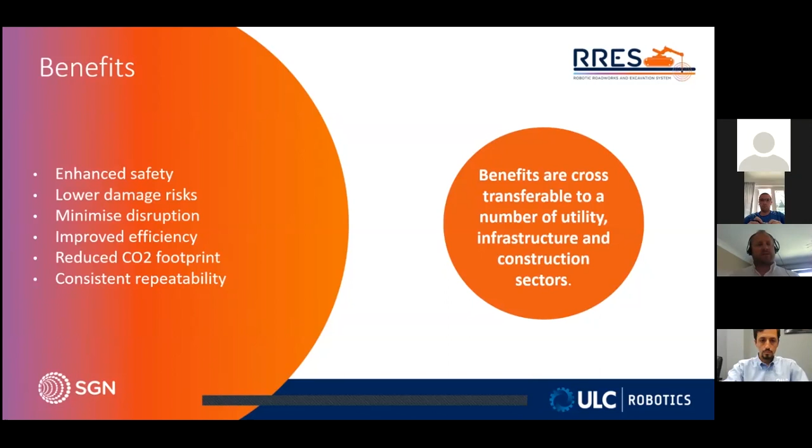Do you want to pick up, Al?

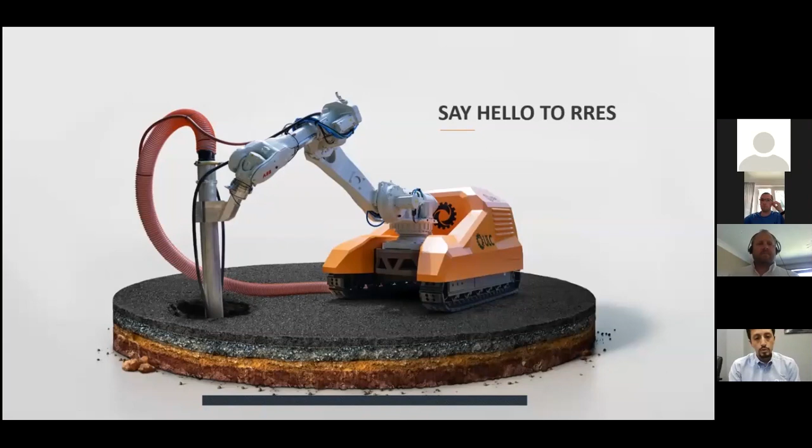Yes, absolutely. Good afternoon everyone. Thank you John and Ollie for the introduction, and thank you all for taking the time today to attend this webinar. My name is Ali Asmari, I am the program manager for the robotic roadworks at ULC Robotics. Today I want to take you through some of the technical development we have done in the past 2 years under this project, and at the end we'll finish with Q&A, and hopefully toward the very end we'll give you a demo of the robot in action.

I want to start my presentation by talking about the robotic platform we have developed for this project. The core of this system is a 6 degree of freedom robotic arm that you usually see operating in manufacturing facilities in a very known environment, doing routine operations like welding or moving specific parts from one spot to the other - mostly behaving very accurately in completely controlled scenarios.

What we have done is taken that robot from indoor use, put it on a track platform, made it mobile, provided it with proper power and control systems so we can take this into basically unknown environments, roadways, and conduct the same routine operations - but adding a bit of smart through AI and machine learning so the robot can take this risky and dangerous work from the operators and provide them with better tools to conduct this operation more accurately.

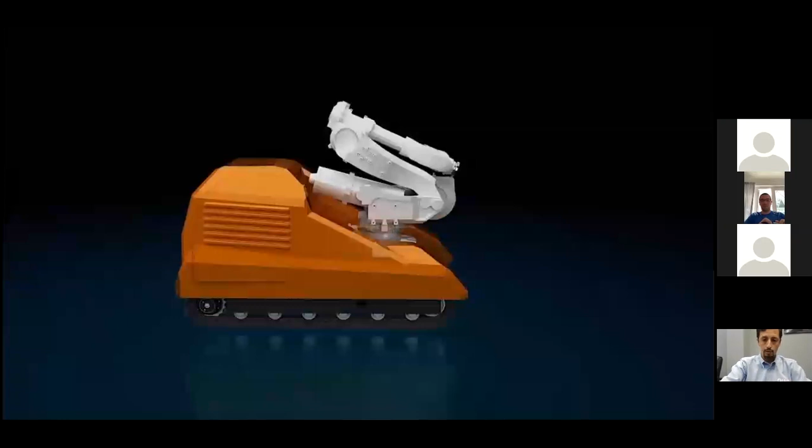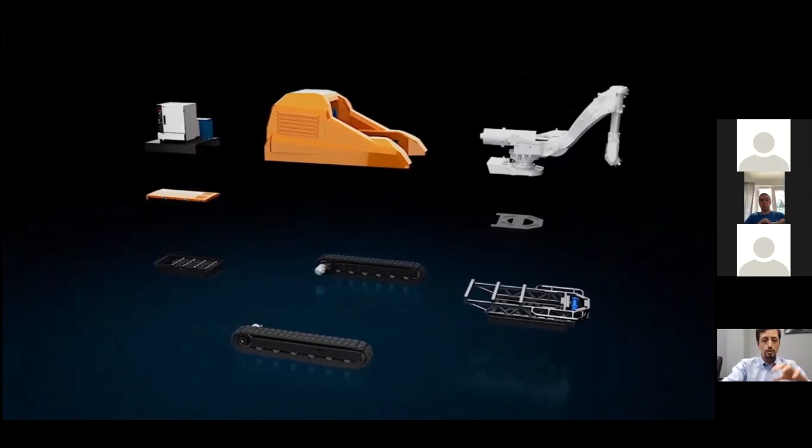So here you see a breakdown of different components of the robot. As I said, the 6 degree of freedom robotic arm, a fully electric power system that can last about 8 hours of operation minimum. The system is mounted on tracks, allowing the robot to go on different terrains, and everything is covered by a waterproof cover that allows the robot to operate in different weather conditions as well.

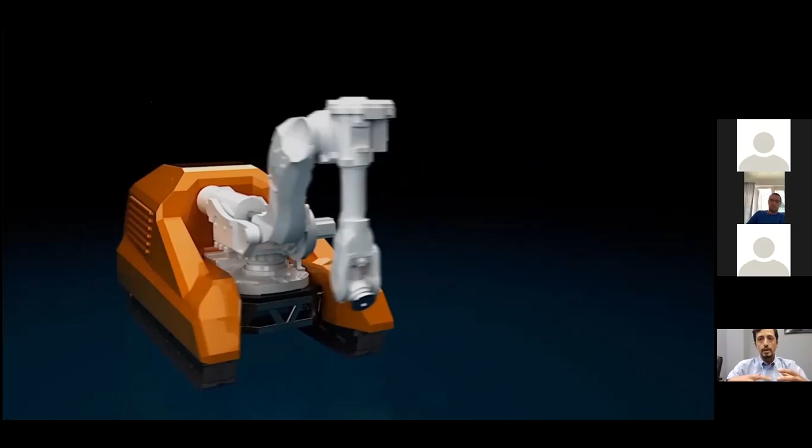Now, the idea is to create this kind of open source mindset development kit that is capable of doing all this operation in new environments outdoor, and then later developing new tools and end effectors for this robot arm to use, articulate properly, and automate different routine tasks.

Under Robotic Roadworks excavation system, our purpose is to automate this excavation operation end to end, starting by scanning the ground, identifying the locations of the assets that are under the ground, then cutting the road surface and removing a core from the ground.

The next step is agitating the soil, the column of soil that's above the buried assets, and then removing them. Once the buried assets and the pipe are exposed, getting the robot to conduct operations on the pipe, such as installation of a fitting, installation of sensors, or doing any type of repair work.

Once the work is done, recycled material would be put back in, and the same core that was taken from the road surface would be reinstated, with the hope that this entire operation can be done autonomously to some point with minimum supervision from the operators.

Now I'm going to take you through the different technical aspects of each tool head that we have designed and created for this robotic platform. To start off, it's sensing the ground. Prior to any excavation, we use a suite of different sensors that the robot carries above the ground and then collects data from above the ground.

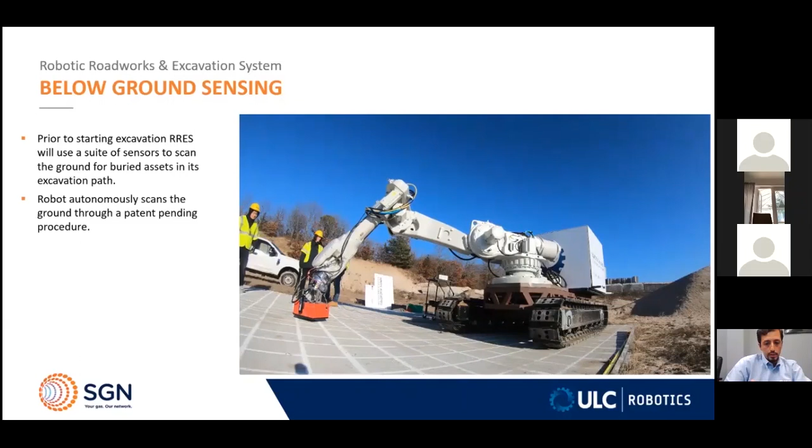One of the main benefits of using the robotic system rather than manually collecting the data is the accuracy of the robot arm, which allows us to basically overlay data collected from different sensor technologies on top of each other, knowing exactly where every single data point was collected from. By overlaying all of them together, we're able to have more precise, accurate maps.

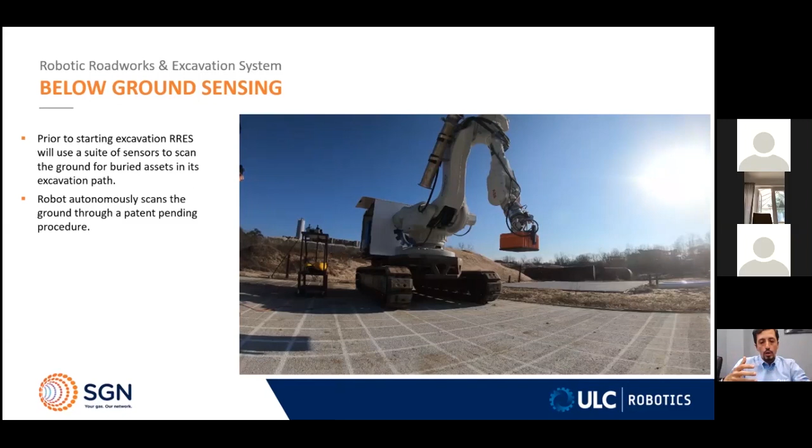And with this accuracy, the robot can collect much higher resolution data.

Once the data collection is done, usually the big challenge is what do you do with the data? This is super technical information that a typical operator conducting the operation isn't able to make sense of. So we have developed computer algorithms that autonomously process all this data collected from different sensors at different locations of the site, process them and fuse them all together, trying to generate a 3D map of the assets under the ground.

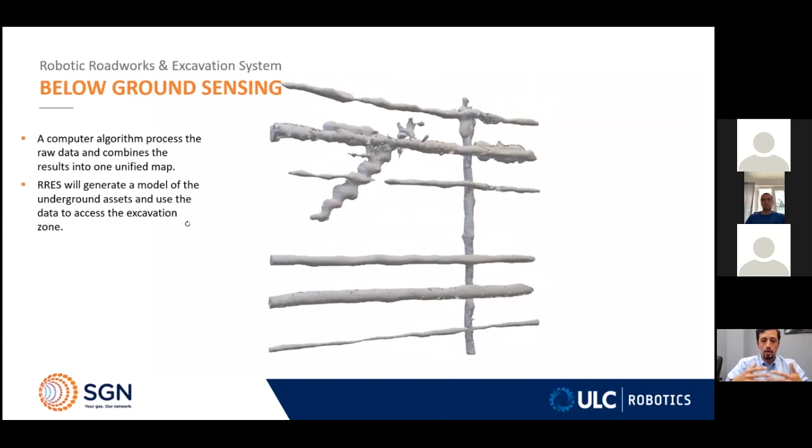Here is one of the renderings of some of the recent work we have done — basically the data collected by the robot, processed autonomously, turned into 3D contour maps, so that the operator can interact with this type of map, identify the locations of the target asset, as well as get an understanding of the environmental conditions around the area where we are doing excavation, to be mindful of hazardous networks like a high voltage cable in the vicinity of the operation.

Once the sensing is done, the target asset is identified, and we know the location to conduct the operation, the next step is cutting the road surface and exposing the soil.

Under the project, we have fabricated a custom road cutting device. This allows the robot to pick up this tool from its tool set and then articulate it in different patterns to create different shapes of cuts on the road. So we are not really bound by a specific size or form factor for cutting the road surface.

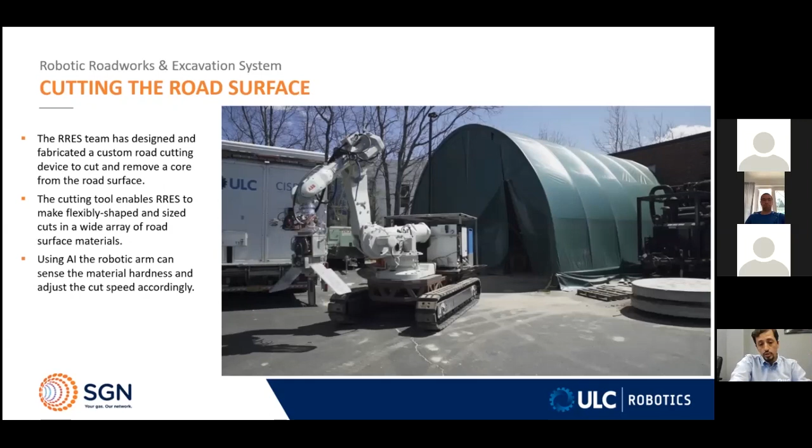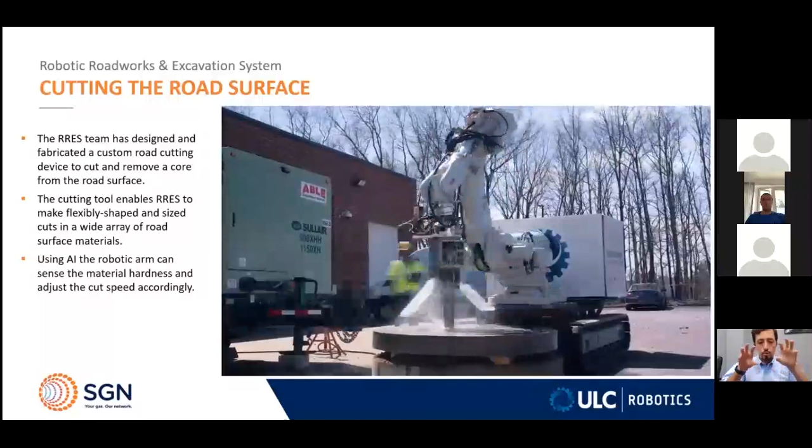Using this tool that you see in this video, the robotic arm can cut not only circles but also oval shapes from the road surface. So the idea of cutting 'Olympic rings' — creating a pattern of multiple round cuts together to expose a wider area for excavation — is completely gone now.

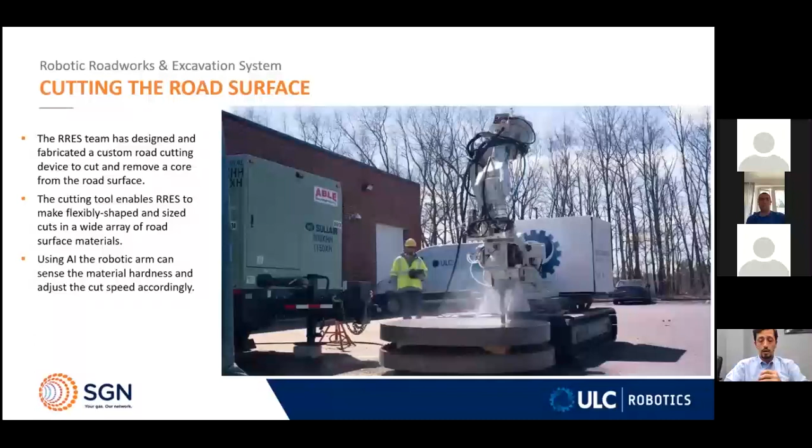The robot can do any form, any size, any shape, and cut it out of the ground. Using AI, the robotic arm senses the amount of load being applied to the ground and the material. In real time, it makes adjustments to the trajectory of the cut, also tweaking the amount of force and load applied, which increases the lifetime of the tool and optimizes the operation.

So when we have to cut, for example, through a reinforced concrete deck, the robot can slow down when it's hitting a rebar and cutting through it. When the material is soft, it can speed up and finish the job much quicker. We can also accurately control the depth of cut, so we know exactly how deep we need to cut before potentially causing any damage to the assets.

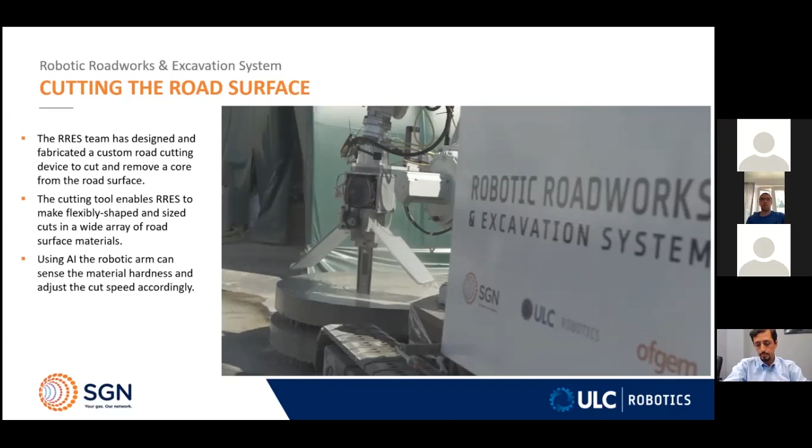Under the project, we have also developed other tools that allow the robot to drill a pilot hole from the core, for example a 75mm pilot hole, giving operators more understanding about the condition of the deck, as well as the depth of cut that needs to be done.

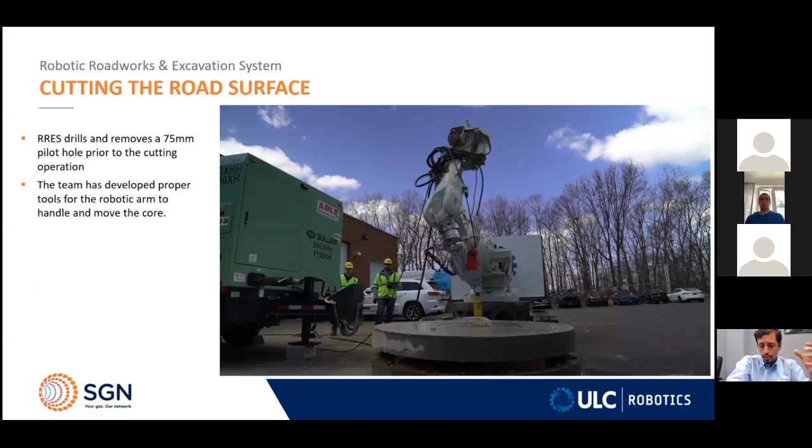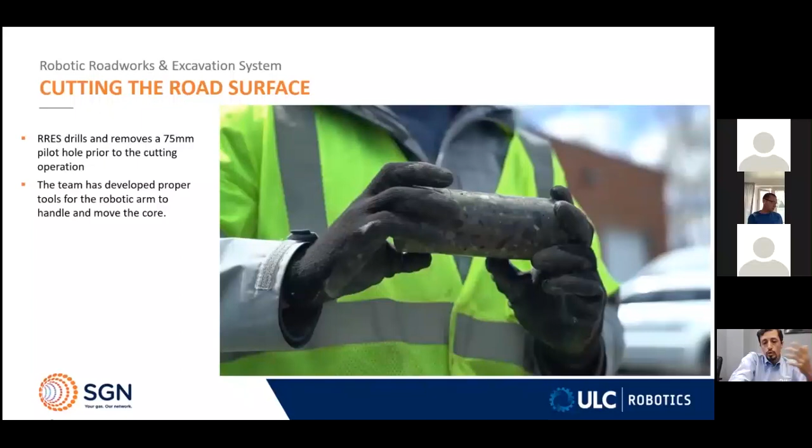The pilot hole can also be used by the robot itself as a grabbing point to remove the core from the excavation site. Here you can see the robot took a core, the operator can assess that, and then the same pilot hole can be used with a different tool. The robot can easily pick up, as you see in this video, the oval shape, or what we call an airplane window — kind of like an elongated circle or a rectangle with round edges — from the ground, allowing us to conduct a wider operation.

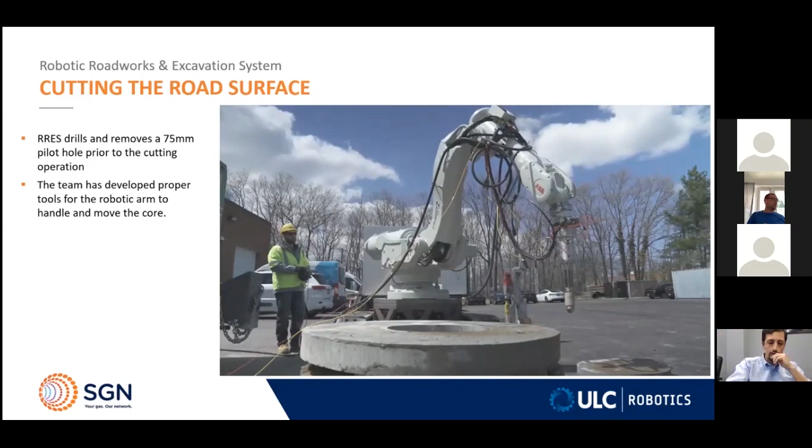So the core is removed. Now the layers of soil above the buried assets are exposed. As you might know, vacuum excavation is being widely used in the industry for exposing buried assets, but one of the big challenges is agitating the soil. vac-ex units can suck up everything that's been agitated.

But currently, the way the operation is being done is heavily dependent on manual labor. It's an operator with an air lance that tries to identify the locations to target and then agitate the soil in tandem with the operation of the vac-ex unit, trying to remove different layers of soil. This is one of the relatively dangerous operations — if you don't have proper insight or the right skill sets, you might potentially damage an asset that existed under the ground that we didn't know about.

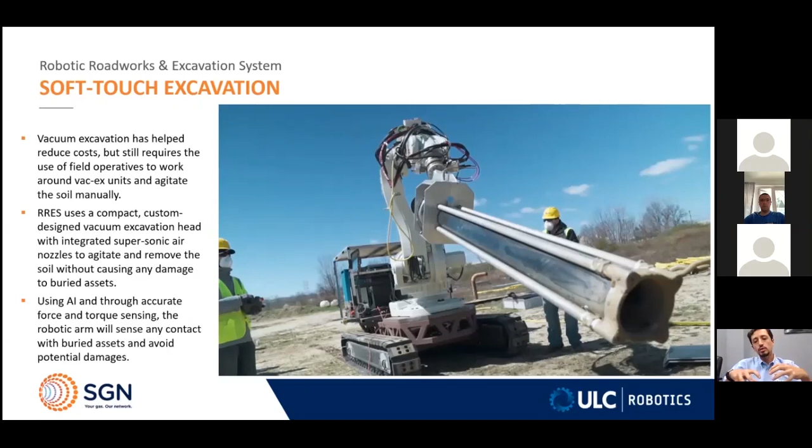So under the project, we did extensive research on development of supersonic air nozzles that would optimize the amount of agitation force that the compressed air can create. Then we integrated all these supersonic air nozzles within a tool head that the robot can pick from its array of tool sets and articulate in the area to not only agitate the soil, but also remove it once it's been agitated.

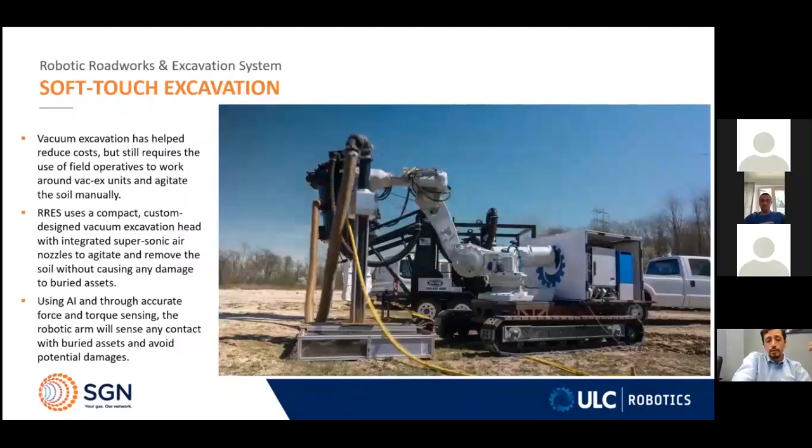Here in this video, you see the operation being done fully autonomously by the robot. What we have done is just set it up for the robot and identify the location. The robot is using these supersonic air nozzles, blasting air in different spots, in different orientations, agitating and loosening the soil, and then the vacuum unit going through the tool head sucks up everything that's been agitated.

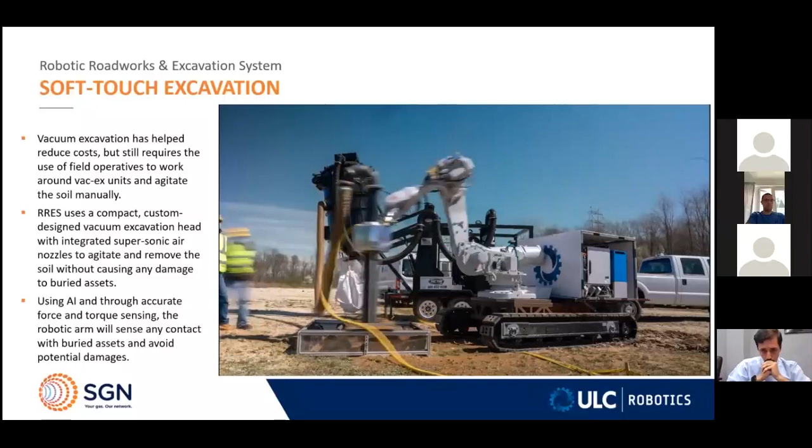As you see, the robot is removing the soil layer by layer, descending the tool further and further down inside the hole. In this video, we excavated about 5 to 6 feet, almost 2 meters deep, in a highly compacted virgin clay soil that we used for this trial.

The other thing I want to mention is the use of AI in improving the safety of the operation. This robotic arm is able to measure the amount of load and torque applied to the end effector at any point. So in case the tool head comes into contact with something, first of all, we're using compressed air so as not to cause any damage to the assets when agitating the soil around them.

But in case we miss a buried asset that we couldn't identify through sensing, and the end effector comes in touch with it, the robotic arm will sense the amount of load and torque applied in different directions, identify this impact, and right away pull back and raise a flag for the operator that there might be an anomaly in this hole. The operator can then supervise the operation and avoid any damage to either the gas pipe or other third-party assets in the vicinity of the excavation hole.

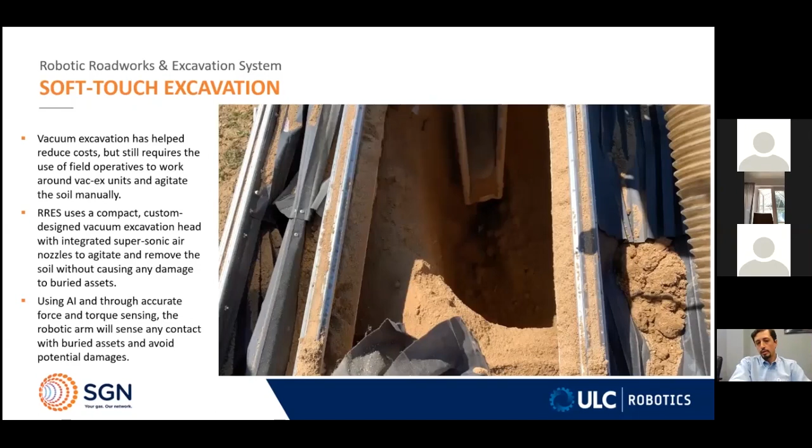So the excavation is done, and as I said earlier, we are doing this operation in a completely unknown environment. The robot itself needs to be aware of obstacles in its vicinity, and once the excavation is done and the assets are exposed, the robot needs to understand how deep these assets are, or exactly where they are, to conduct operation on them. So we developed this using computer vision and AI, using a series of different sensors integrated within one tool head, so the robot can create a perception map about its environment and the area it's about to conduct operation in.

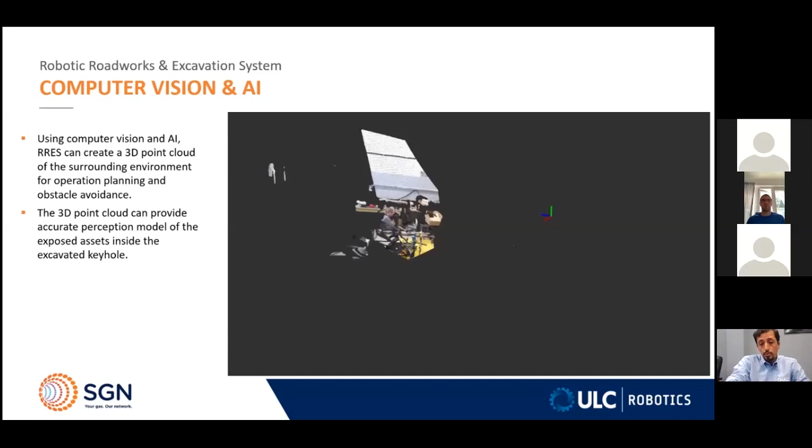So here, what I'm going to show you in this video is we installed this tool head at the end of the robotic arm. The robot is housed in our shop, and this robotic arm circles around the room, looking at different spots using the sensors. As different parts of the room become visible to the field of view of these sensors, the robot arm measures the distance of every visible point to its center, creating a point cloud, or basically a 3D perception map of everything around it.

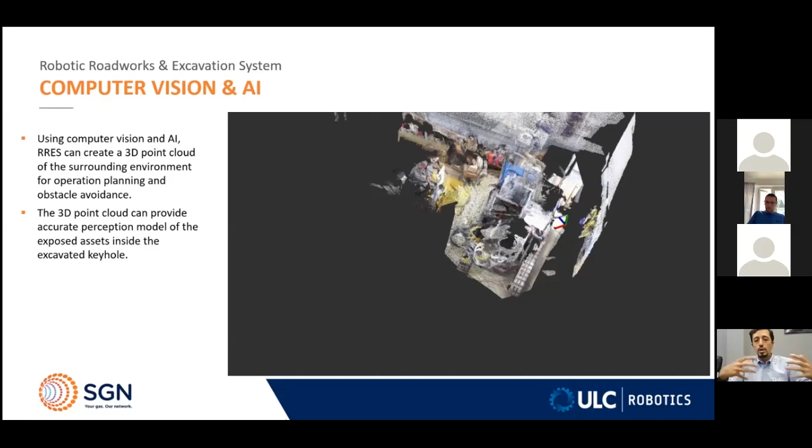So as this robotic arm is moving around the room, it's kind of looking at itself. It's looking at the walls, it's looking at the operators in the vicinity, creating all these obstacles that it's not supposed to bump into. So later, this point cloud, which also has color information, can be used to identify not only the obstacles, but what that specific obstacle is that we're interfacing with.

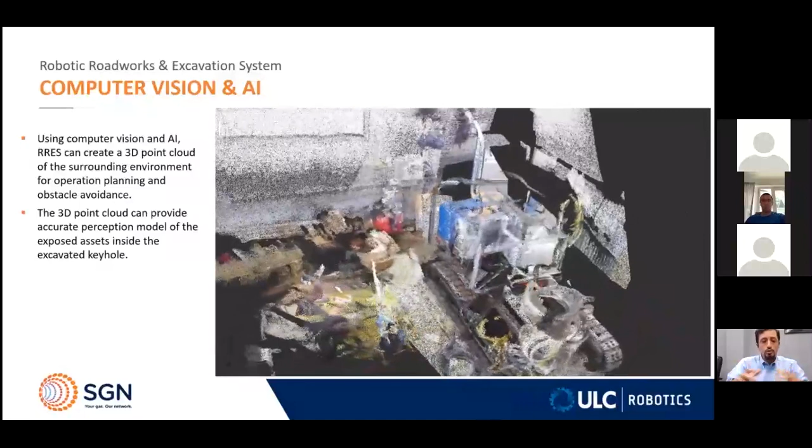Is that a plastic pipe I'm working on, or a metal pipe? This provides information for future development of other tools to conduct operations on the exposed assets. As I mentioned, there is very accurate measurement that can happen, doing volumetric measurements of the excavated hole to, for example, account for the amount of recycled material that needs to be brought back to the site for reinstatement.

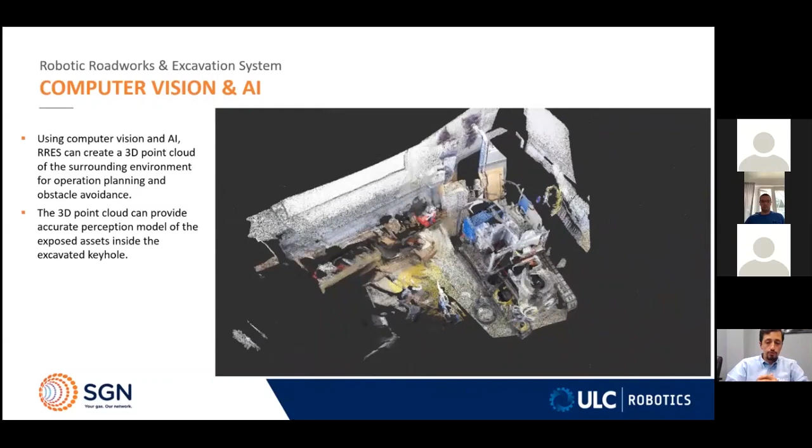So the excavation is done, a 3D model is created, the asset is exposed. The next step is to conduct operation on these assets. Right now we are in the process of developing tools to prepare the pipe and install a fitting on a gas pipe. This is kind of the start, the proof of concept that a robotic platform is a meaningful tool to conduct all of this operation end to end with minimum supervision and intervention of an operator.

This basically opens up the door for other industries, for other networks, electric networks, water networks who have assets buried under the ground, as well as gas companies who always do these types of operations, to develop other custom-made tools that can facilitate some of the operations they need to do. So, bringing the operators out of the danger zone.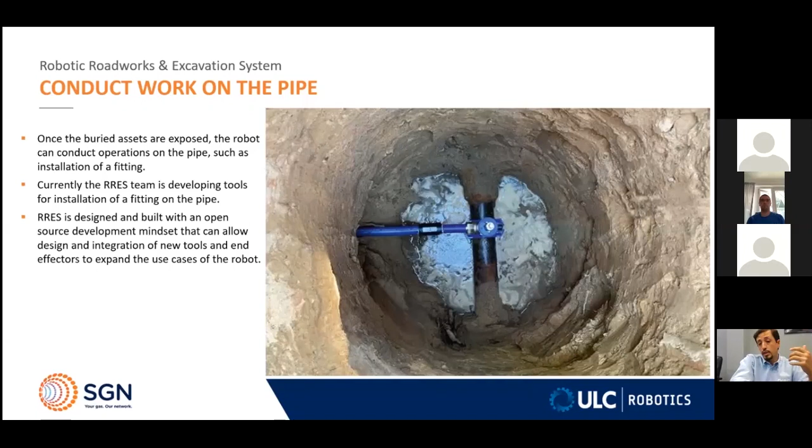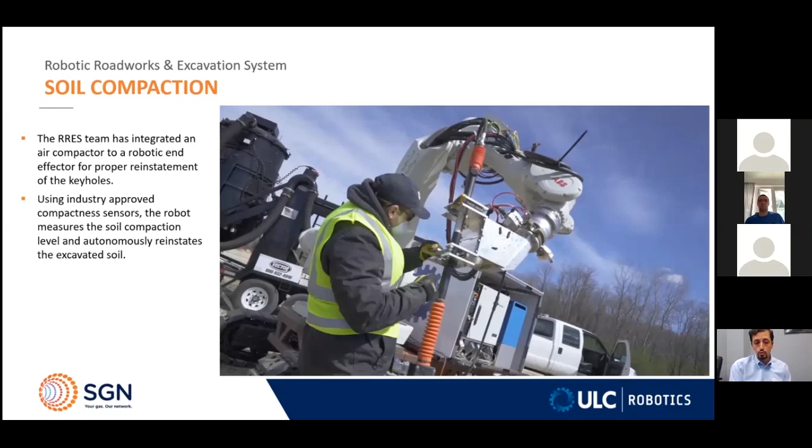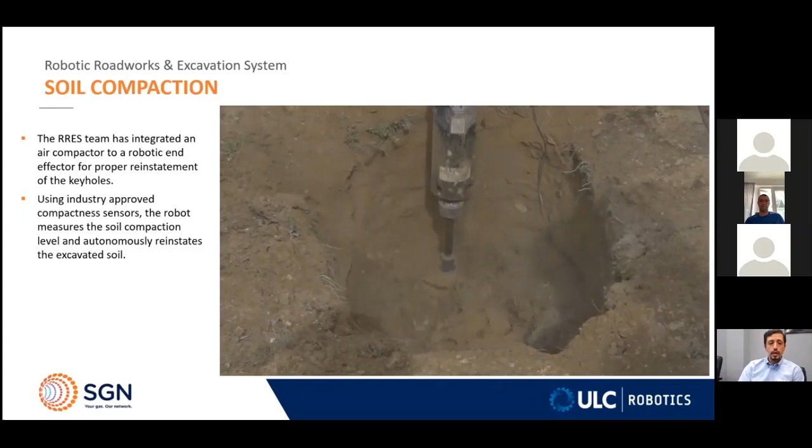Once the operation is conducted on the buried asset and everything is completed, now it's time to reinstate the backfill material, the recycled soil, in the excavation hole, tamping it in place, and then preparing it for reinstatement of the core. So what we've done here is integrate an air compactor into a tool that can also be picked up by the robot arm.

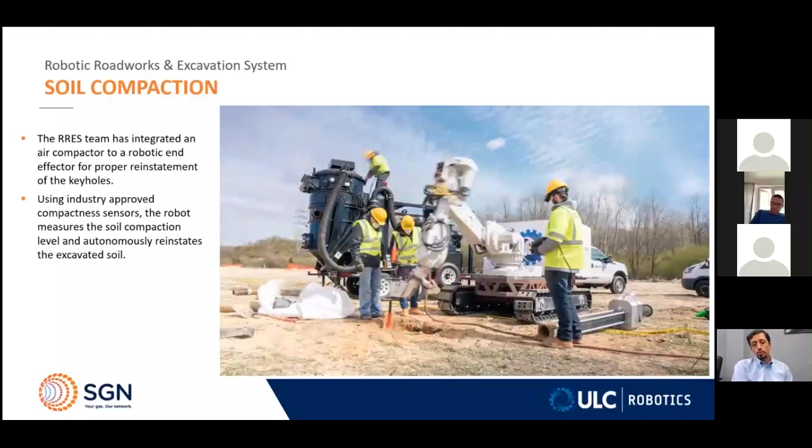As you see in this video, what the operators are doing is basically just pouring backfill material, recycled soil, into the hole, and then the robot, having approved compactness sensors at the bottom of the hole, will measure the amount of compactness of the layer of soil that's put on top. It will compact it until it reaches the requirements of compactness. Once that layer is done, the robot brings the tool further up, and all the operator needs to do is supervise and provide the backfill material to the system.

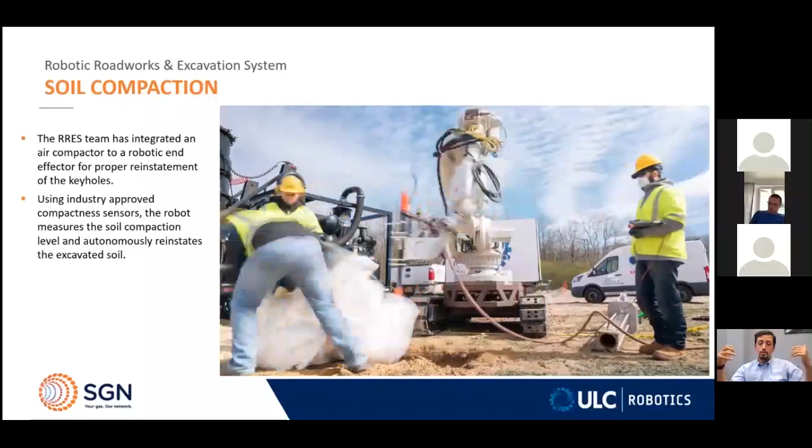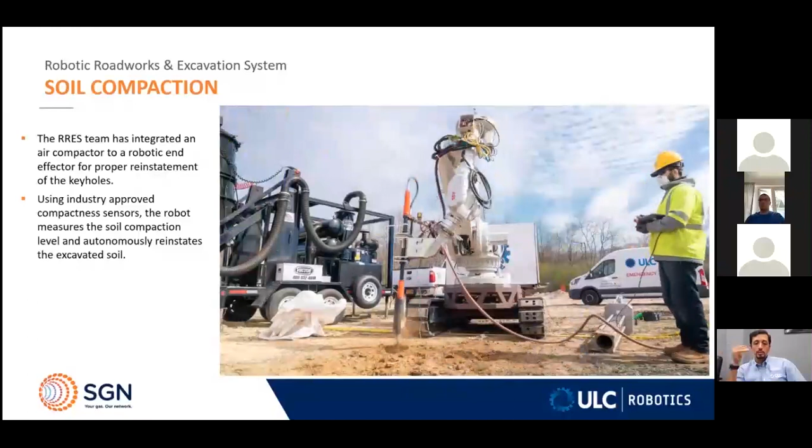The robot, as you can see in this video, can autonomously compact the entire thing, knowing the footprint of the area that's been excavated, and prepare the ground for reinstatement of the core that was already taken from the road surface. So at the end of this, the core that was excavated using the same tool will be picked up and placed back into the excavation hole with proper bonding material around it.

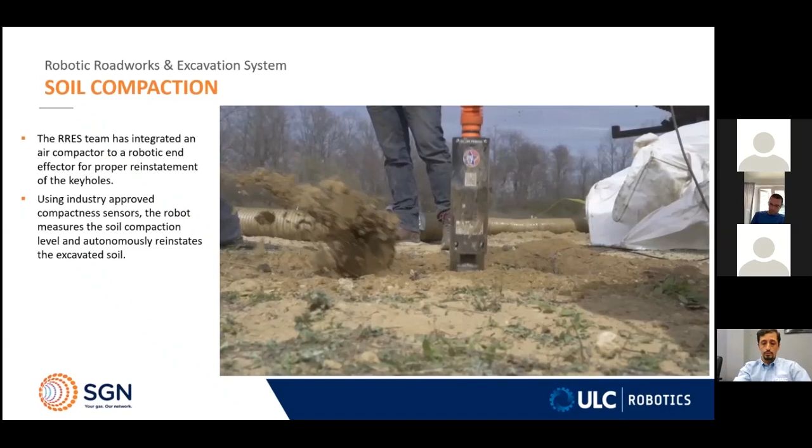And that's the end of the operation, from beginning scanning all the way to reinstating of the ground.

As Ollie mentioned, this is a 3-year project. This phase is about 3 years, and we are 2 years into it. We have another year left, and in the coming year we are working on different aspects of autonomy for the operation. As you saw in these videos, most of the tool sets are already developed.

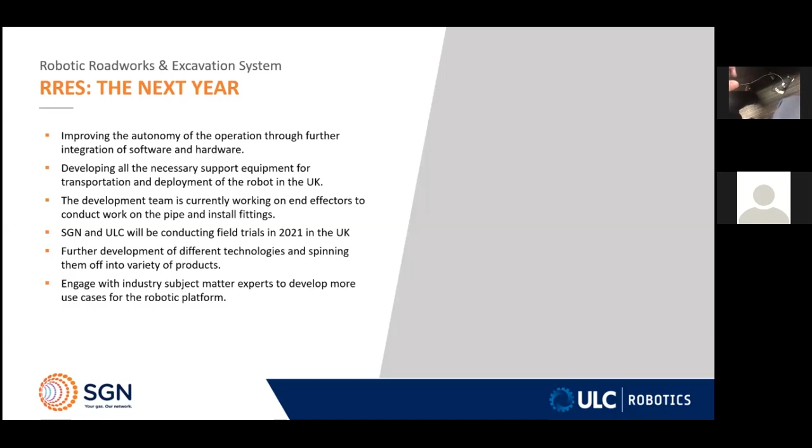We are creating more AI algorithms that would allow the robot to make decisions on the spot. We are also developing any necessary support equipment for transportation and deployment of the robot, eventually in the UK. That includes means of transportation, storage of the robot, and providing anything required to have the entire operation done at the site, be it a VAC-X unit, compressed air, or even a charging station to charge up the robot between 2 days of operation.

We're working on other end effectors to conduct operations on the pipe, prepping the pipe, installation of a fitting, as I explained earlier. The target goal is to bring the robot to the UK in early 2021 for field trials of this entire end-to-end operation.

We are also collaborating with SGN to further develop every single technology that we were able to create under this project, and potentially spin them off into a variety of products. So the sensing capabilities and the software package that we have developed for creating a 3D model of under the ground can be turned into an independent product that can provide services to one part of the utility industry.

The cutting tool itself, the excavation head, these are all independent developments that can turn into independent products, as well as being part of the tool set that this robot currently has for its operation. So we would like to engage with industry subject matter experts to hear about their needs around excavation, and in general any type of operation that can be automated in outdoor environments, and potentially develop custom-made tools to fit their needs.

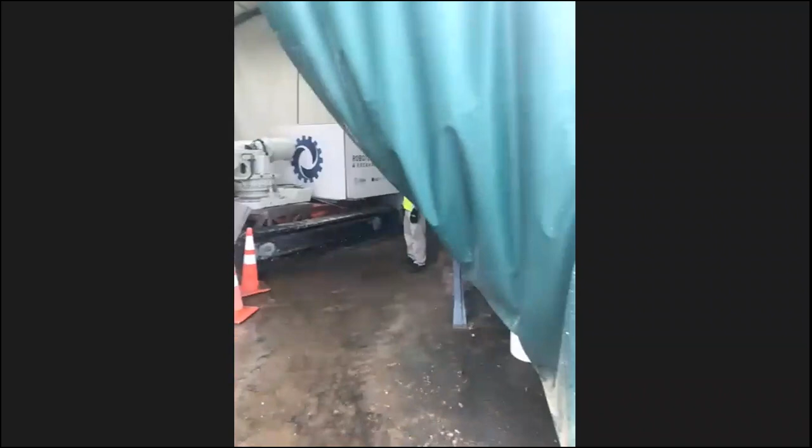All right, sorry if it was a little loud. That was one of the closest I've gotten to that tool, actually. I'm now walking back to the conference room so we can carry on with the rest of the questions you might have about the system. Okay, thanks Sally. No problem.

So I was going to link three questions, possibly for Ollie to answer in the meantime, about the operation. Moving away from the sensors - how does the machine work in clay? That seems to be a perennial problem for a lot of people. How accurate is it in terms of compacting around covers and frames? And how does it cope with digging a trench or a larger excavation, something wider than its own footprint?

Yeah, clay is the nemesis of GPR typically. It's our target material for GPR, so we're pretty confident. We took samples of clay from our sites and created setups to test that suite of sensors. We're pretty confident we found a way through the issue of clay. What we're trying to do is chase the nines on it to make sure we've got the degree of assurance we'd want to be able to do the cut.